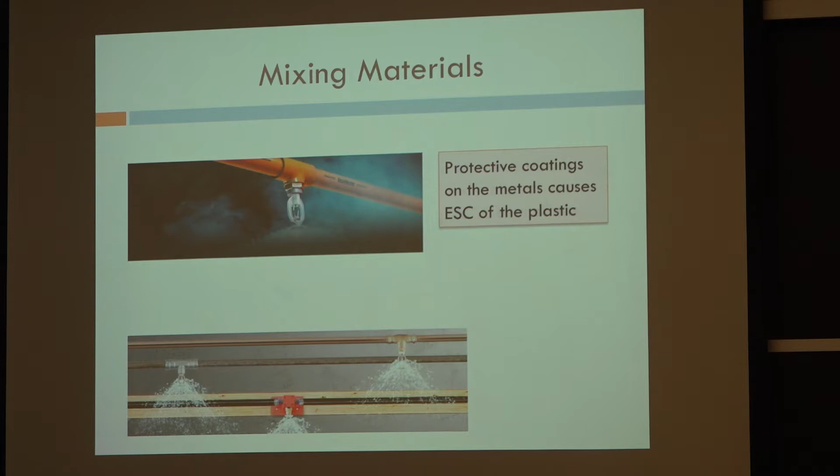These things actually operate around 200 psi, and so this gets a lot of water. But no one has ever died in a home that's had a sprinkler system in over 100 years. So it works. You might end up with a home that's flooded out, like Houston, but it works. It keeps people from dying in fires.

Nonetheless, they decided they wanted to go and save some money. Instead of using copper or steel, they decided to go with plastic, and it turns out it's not a problem with the plastic, but the problem is that the water comes in on some of the old steel pipes, and the steel pipes had a biocide sprayed on the inside to keep the bugs and the corrosion down.

It turns out that polymer they put on the inside of the steel pipe gets into the water, and since it's stagnant water, not flowing through like in a potable water system, it just sits there and cracks the plastic. So there are lots of buildings in this country right now that have sprinkler systems that work all the time, but they're leaking.

And so there's a lot of secondary effects that you don't always think about that you run into.

I did want to kind of shift gears and take a couple of industries and talk about what's happened in some of these industries. This is the gas turbine industry, so if you're interested in aerospace and engines, it turns out...

Whittle was the British guy who developed the gas turbine, and there's a nice quote from him on how he invented it in like 1936. It was during World War II that it actually came into use, and the Germans had V2 rockets and things with turbines, some of the first gas turbines. But those original gas turbines didn't operate at very high temperatures.

In fact, most of them worked at stainless steel temperatures, so you were talking 500 or 700 degrees centigrade, which is not terribly hot. In any case, people started working on better and better materials, and these were uncooled, solid materials.

They started going to nickel-based superalloys in the 50s, 60s, and 70s. As they went to the nickel-based superalloys, they learned you didn't like fine grain sizes. Finer grain size at high temperature meant creep.

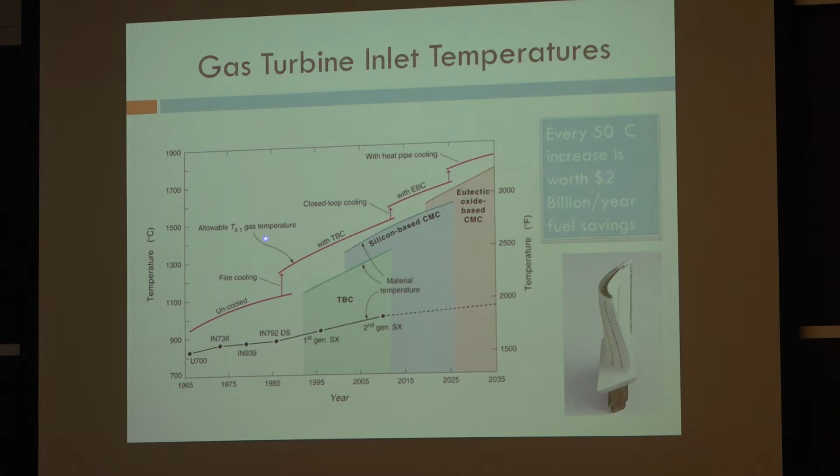But why are they doing it? Because every 50 degrees centigrade increase in operating temperature of that engine is worth $2 billion a year to the commercial airlines in fuel savings. It doesn't take much to end up with a lot of money. So we can talk about the value of a pound saved in a structure, but when you start looking at some engine that's driving it, you can have multiples. That's why people spend so much money on engine technology.

In that figure, it has silicon-based CMC starting back in 2004 - is that not something we've seen yet? Because in 2017, we should be using that for the figure.

This figure was probably developed in 2004 or 5, and people were looking at niobium silicides and things like that because they're intermetallics, and they have higher melting points - not 1250 centigrade, they might be 2000 degrees centigrade, but they're brittle as can be. No one solved that brittleness problem. And they say, well, we're going to eventually solve the brittleness problem in our ceramics. Well, yeah, good. I'm not invested in that one right now.

But people are working on it. I remember serving on a committee back in about this time frame that was looking at how the Air Force should spend its $300 million a year in research money for engine development. It was a very interesting committee because there were about 40 of us on it - 2 of us were materials people, and a number of people were from General Electric, who was the chief engineer on such and such engine.

I can go back to an Ashby plot here somewhere - I think it's this plot that shows maximum service temperature, and there's nothing that goes to 3,000 centigrade, okay? It just doesn't exist. We don't have things with strong enough bonds. Diamond might do it if it didn't sublime before then or burn in the air.

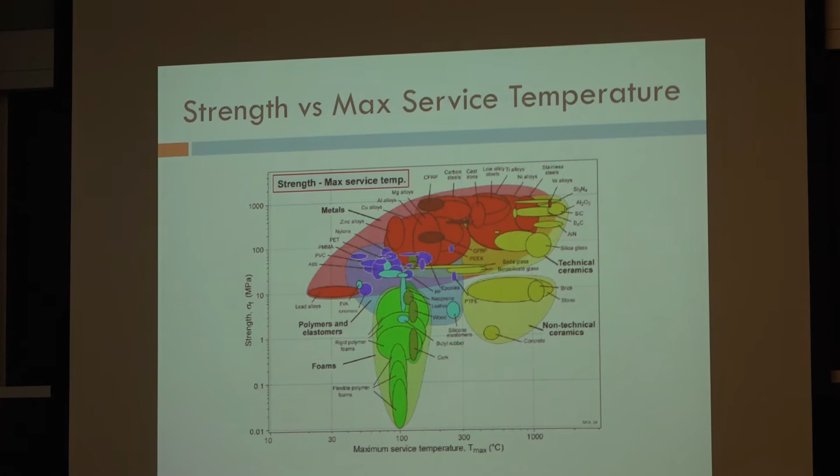So we would say we needed better designs. Well, this is like a 1975 design, folks - this is our 1980 design, not the latest stuff. They're getting these things down to less than a millimeter thick, like half a millimeter, and they have designs of 0.2 of a millimeter thick for the walls.

Do you know how hard it is to cast that with any accuracy? They do it - the reason we have CAT scanners for metals today is primarily because every turbine blade gets a full CAT scan to measure the wall thickness.

Because you've got a core that you cast this thing around and grow a single crystal around, and if that core is off by 2 or 3 thousandths of an inch from its perfect position - and its perfect position isn't just a center axis, it's a center axis and a twist - you're off by 2 or 3 thousandths over a couple of inches on something that's going to heat up to 1,300 degrees centigrade and melt, and it's a piece of junk. All of a sudden your manufacturability drops way off.

They continue to make progress because they spend billions of dollars. The problem the Air Force had - am I going in the wrong direction? The problem the Air Force had is they only had $300 million a year, and they wanted to know how to spend it. The other problem they had was that they didn't just want regular old engines.

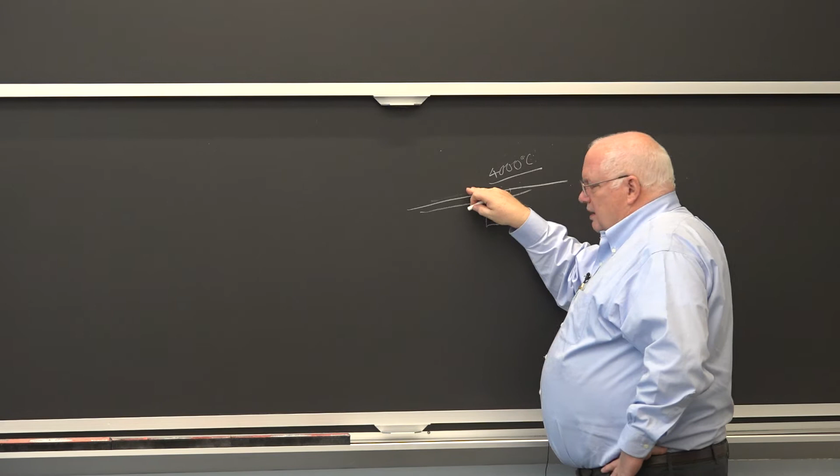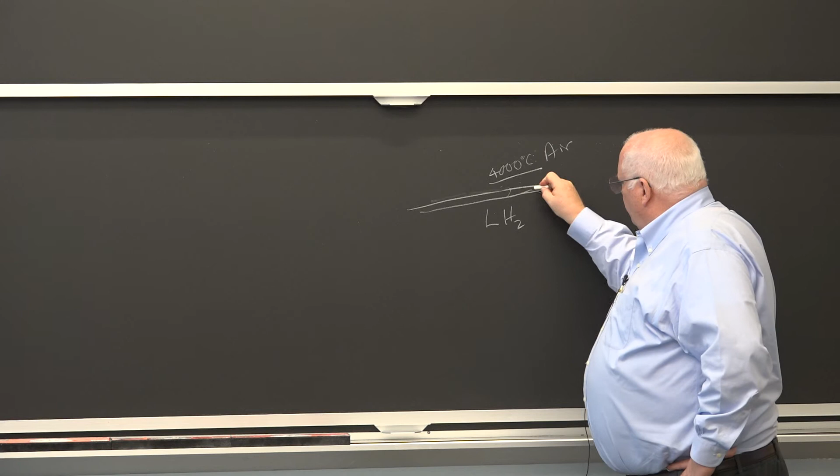You've learned that here. And they were going to basically bleed the hydrogen, have the cooling of the hydrogen. On this side of the thing, back in the National Aerospace Plane, it would be 4,000 or 5,000 degrees centigrade out here in the air - that's the frictional heating across the surface - and it would be cooled with liquid hydrogen. This would be a copper alloy. Copper alloys are not exactly known as high temperature alloys, okay? But it's going to be cooled, and this, they calculated, should be about no more than 2 millimeters thick, 80 thousandths of an inch.

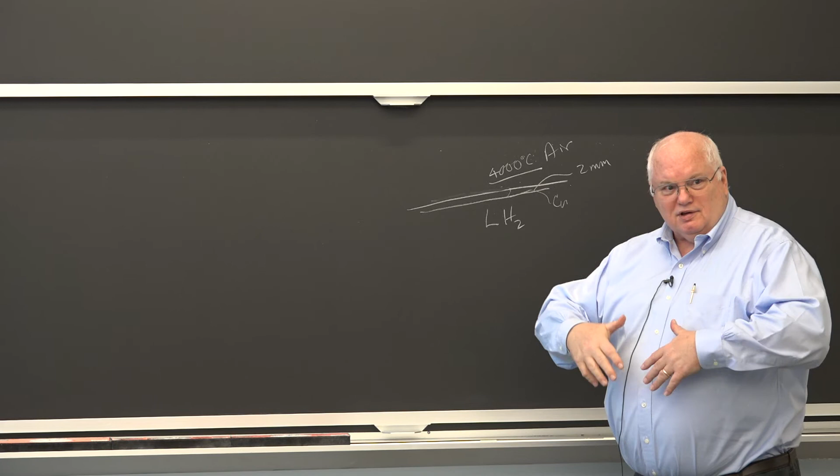Now, if you ever got a hole, a leak, it's the Space Shuttle Challenger all over again. Kaboom! Because you've got hydrogen in air at 4,000 degrees. It burns, okay? So, the risk benefit here, okay?

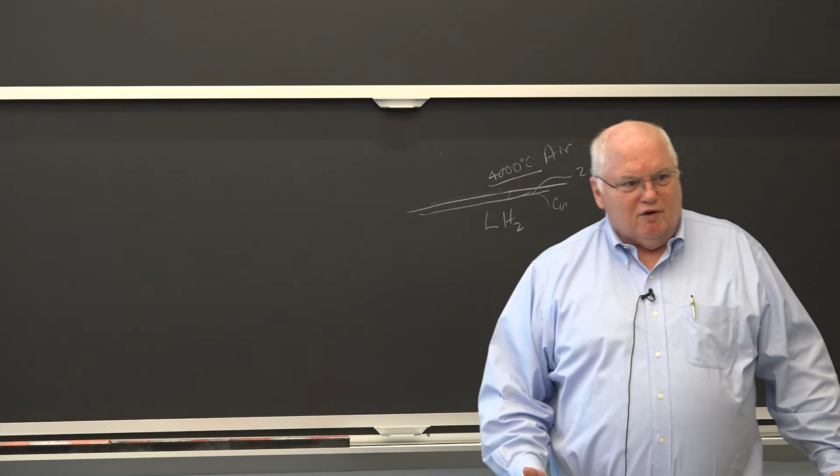Or do you know what risk is? Do people know what a risk is defined as? Risk is defined nowadays, this is done by psychologists, as the hazard times the opportunity, or a consequence.

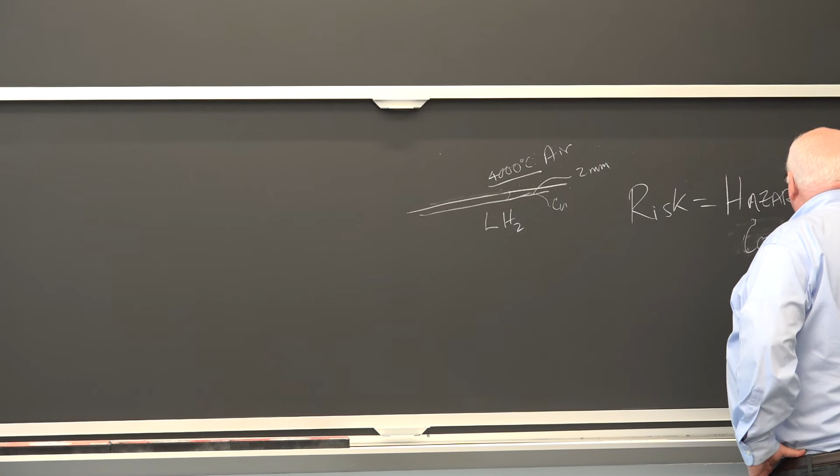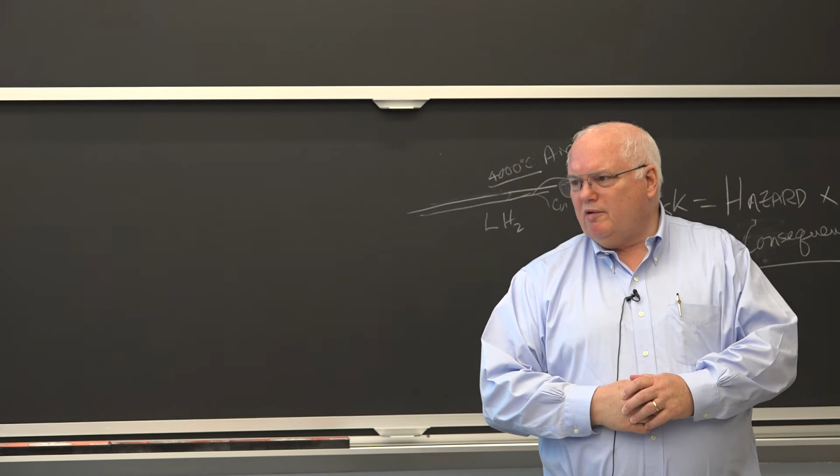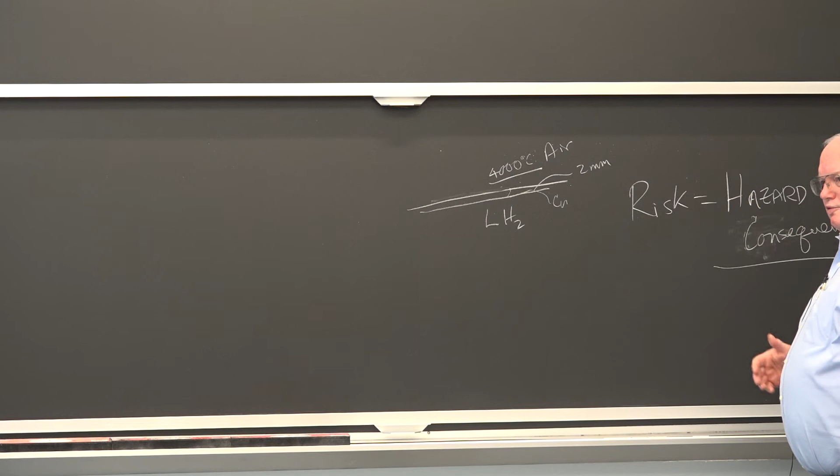And so I was actually just talking to somebody yesterday. I used to talk about if I'm manufacturing bricks for a building, I can probably tolerate one bad brick in 1,000, because if a brick is bad, the guy will probably throw it out, or even if he does mortar it into the building, it's not going to collapse because of one bad brick with a crack in it, right? But if I'm building Hubble telescopes, my quality should be more like 1 in a billion chance of failure, because the consequence is you can't fix it, okay, if it's the Hubble telescope. Or actually they did do some fixes, but they're very difficult and very expensive.

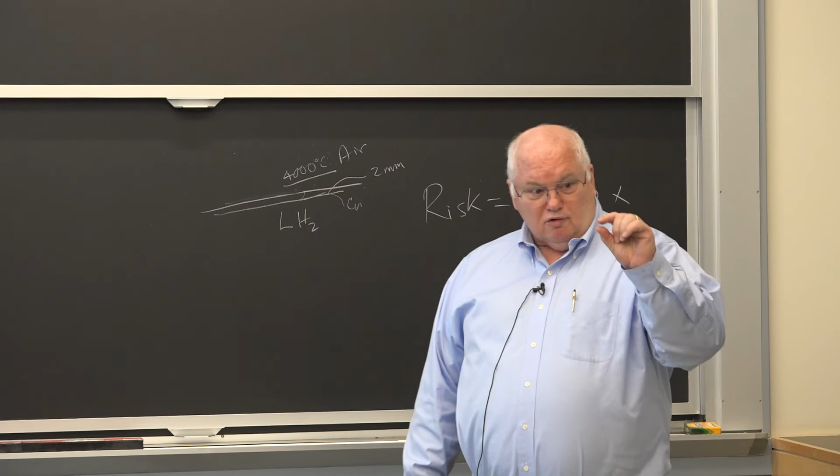The hazard here for the National Aerospace Plane was pretty severe. You'll blow up the whole aircraft if you have one small leak across something. And what are the thermal stresses across here? I mean, there are some thermal stresses, right?

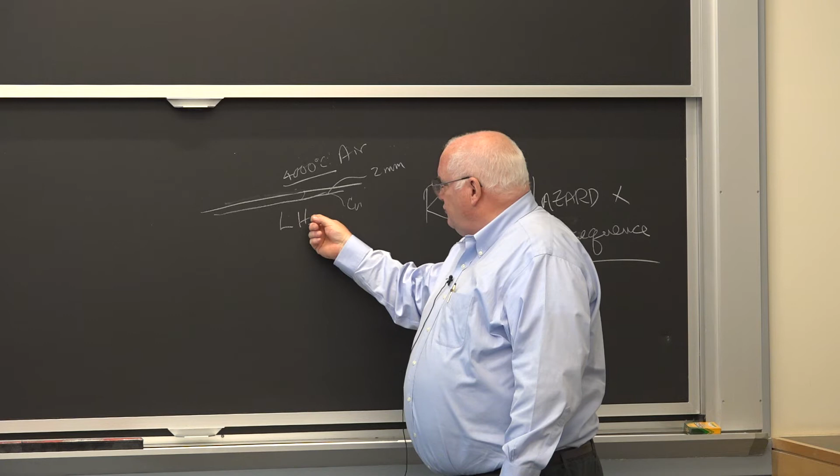270 minus 270 centigrade and 4,000 centigrade.

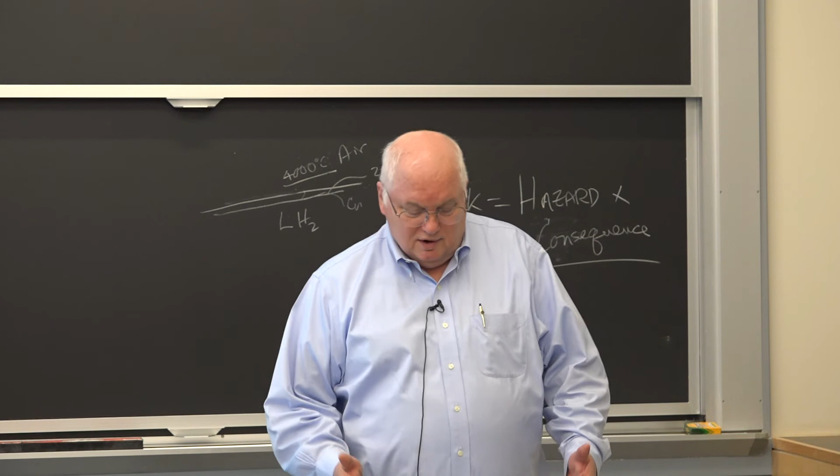I thought these are the Air Force's best designers, but they're people designing things to get money, funding from Congress. So it has nothing to do with anything that's practical. You look at these things and say, is this the best investment of our money? Couldn't we buy potato chips instead? I mean, anyway.

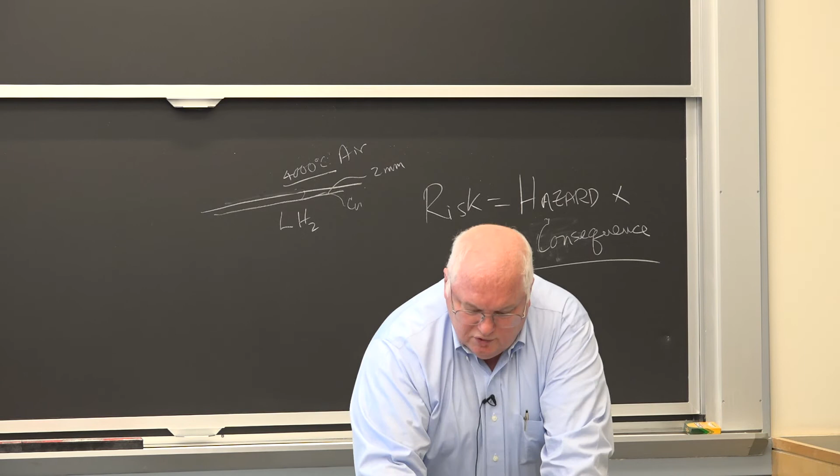Okay, so we did this review yesterday, or a couple days ago, and here we had good old Ashby basically pointing out a lot of our traditional metals where development is slow. He said mostly quality control and processing. We've hit the limits on the turbine blades, we've hit the limits on steel. I often point out, since I point out steel is the most important metal in the world, it is the most important metal.

It's not the most important material, it's stone. But steel, we spend more money on research on steel than we do on silicon. A lot more. Why? Because the industry is 10 times larger. Even if we only had 20% of the research on steel, it would be twice the research on silicon, even though the percentage research on silicon might be higher.

I actually wrote an article back in the 90s about the real challenge in materials engineering, and I was saying it was to basically make things less expensive, not go for tremendous property improvements, because frankly over the 20th century we did a lot to improve properties. We're actually getting to the limits of some of the properties, like the melting temperature, okay?

Okay, let's talk about something—Maslow's hierarchy of needs. I haven't talked about that in here yet. You know what Maslow's hierarchy of needs are? What are they? It's a little pyramid scheme, right? Not exactly a pyramid scheme, but at the bottom is food, shelter, and clothing. And then you have other needs, and up here it's self-actualization.

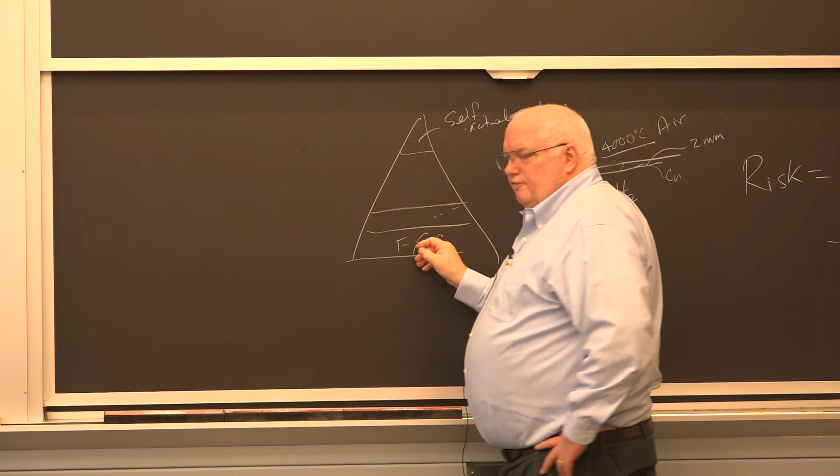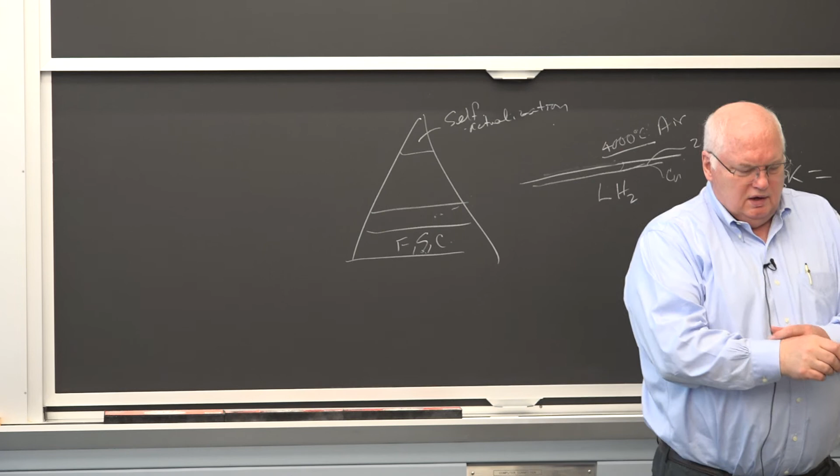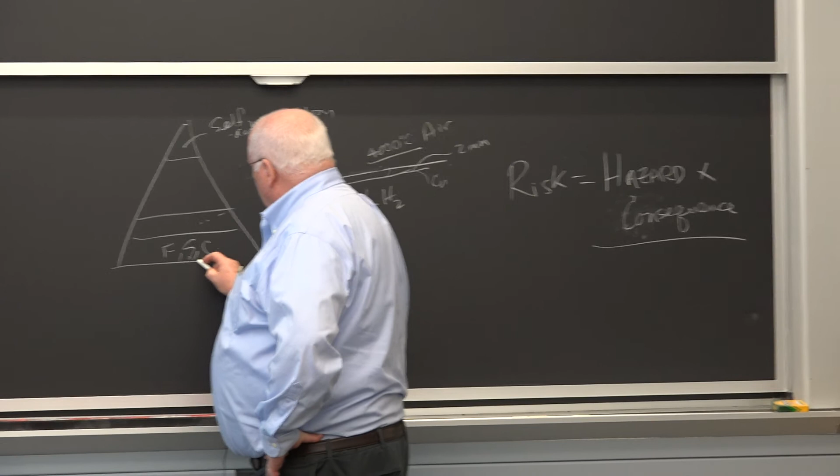But people first are interested in basic needs of life: food, shelter, clothing, housing. Then they can worry about getting an education or other things. You can look up Maslow's hierarchy of needs. He came up with this back in the 50s, and now a lot of people criticize it, but nonetheless it's fairly well known. Actually, I have a good slide, you can find it if you wanted. But there's been some other things added down here to Maslow.

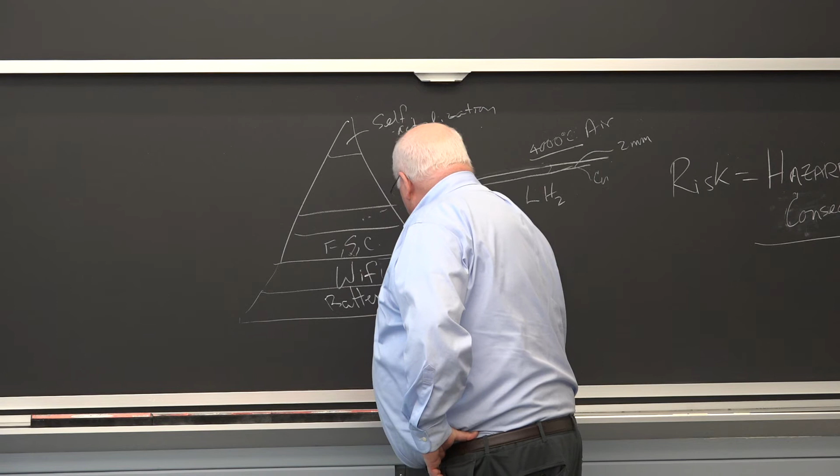There's two other things below this. The first one is Wi-Fi, more important than food and shelter. And the other is battery life, more important than Wi-Fi. Anyway, so we've added to Maslow.

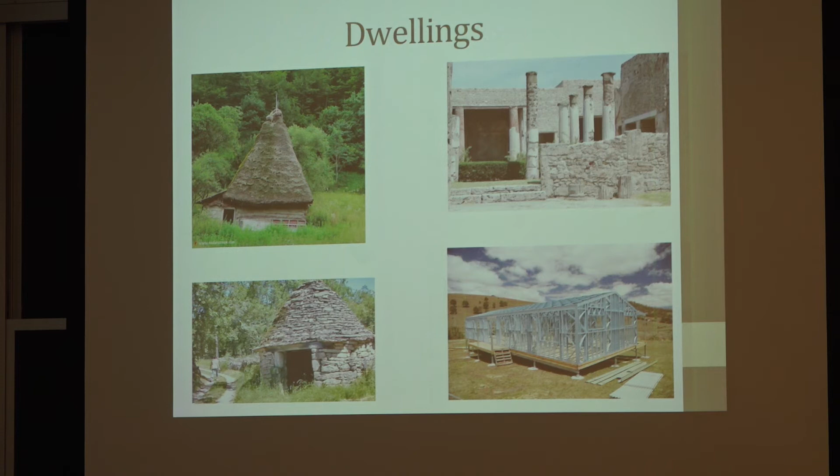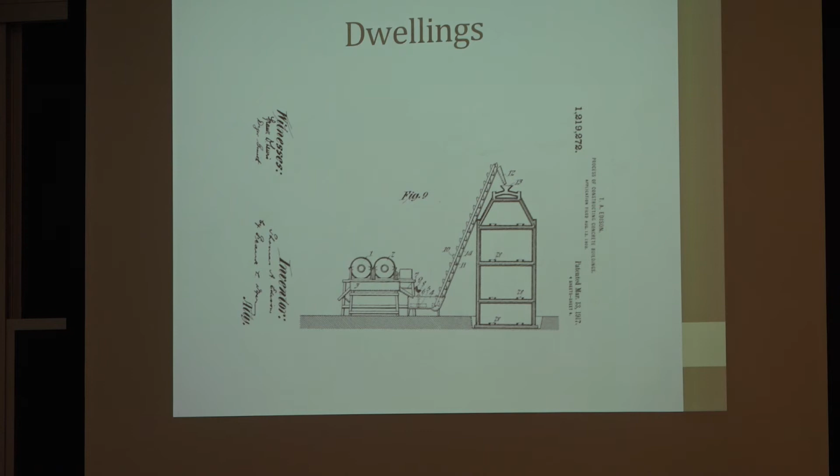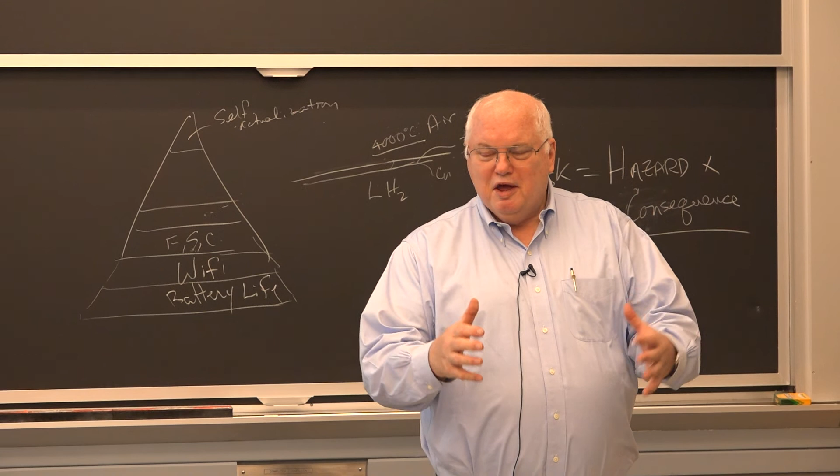Can you think of an advantage or a disadvantage? You have earthquakes—you can't have an earthquake? Actually, if it's a small home, you can. I mean a small block, it's not going to... but you're right, a big building, earthquake, no, you got problems. And part of the problem is I don't think he was doing reinforced steel, reinforced structures and stuff. But yeah, earthquakes could be a problem for big ones.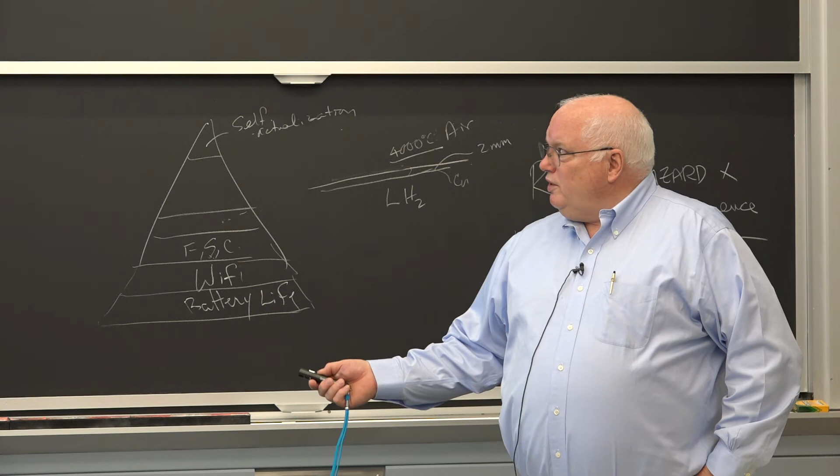And nowadays, we wouldn't build a structure like this. The codes wouldn't allow it unless we reinforce it with steel, okay? Because of its lousy, or its brittle nature, its lousy tensile properties.

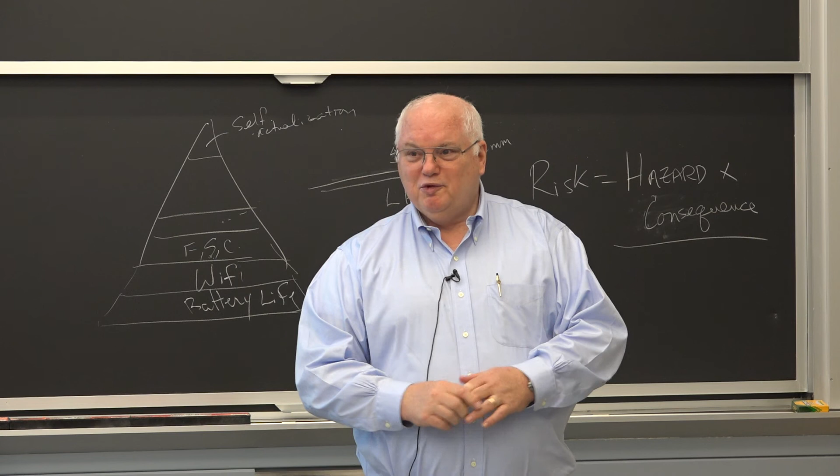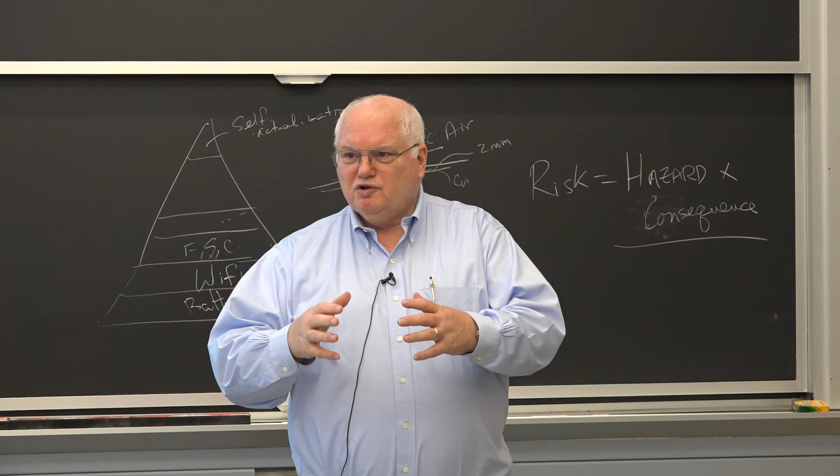We made blocks and cast the polyurethane and measured it. But basically, the codes say you're not allowed to put it down in layers more than 2 inches thick at a time. If people go in there spraying it 4 or 6 inches thick, it's such a good insulator that the exothermic nature would basically ignite. So you burn down your home by putting insulation in. But now they have codes and standards to correct for it.

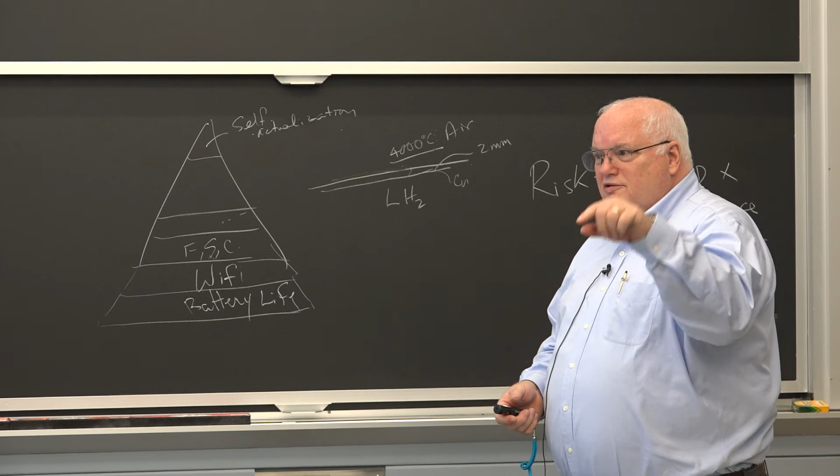Other thoughts? Fire, it's going to be very fire resistant. You can't remodel it. Not only does yours look like everyone else's in the neighborhood, but you can't do much. Can you imagine what people are going to be trying to do? You can't put nails in the wall as easily as wood. There's no creativity in refurbishing your home. So there's lots of things to start thinking about when you start thinking about these things.

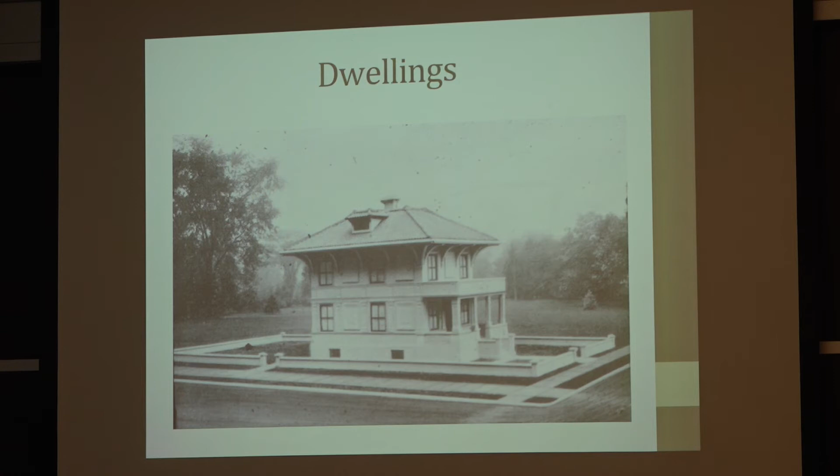Actually, people have been living in concrete block houses. That was a project a student did once—she was from Mexico and she did adobe. With adobe, I didn't know this, but they tend to use manure in many cases because it keeps the flies away. So it's just straw and manure, and you build your house out of that. One of the problems is it does smell for a few years.

Anyway, melting of metals—I want to talk about metals now rather than concrete. But people will look—I guess I just brought up Edison and his concrete home as an example of people looking for different things to use. With concrete, they look at it because it's cheap. You can't exactly move that home—it'd be cheaper to blow it up than to move it.

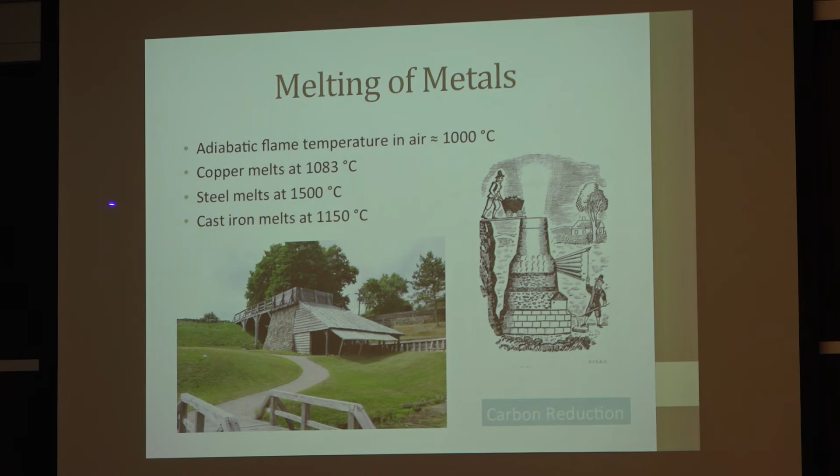For years, we could not melt steel, and I'll talk about that. Cast iron melts at 1150, so you can actually build a blast furnace.

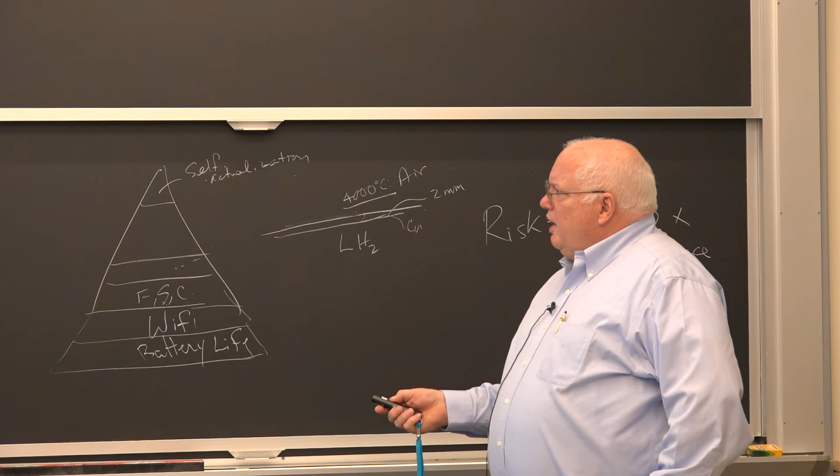This is a picture of an old blast furnace. You have some guy at the top precariously here, dumping coal and limestone and iron ore into this blast furnace. There's bellows here. If you go to Saugus Iron Works, this is the Saugus National Historic Site, the first cast iron foundry in the United States.

There's actually a water wheel, and that's the sluice for the water wheel. This is the platform where they drop the stuff in the top. This is actually the chamber, the stone blast chamber. The sluice would run a bellows that blows the blast of air in here to get up to the 1150 degrees you need to melt cast iron.

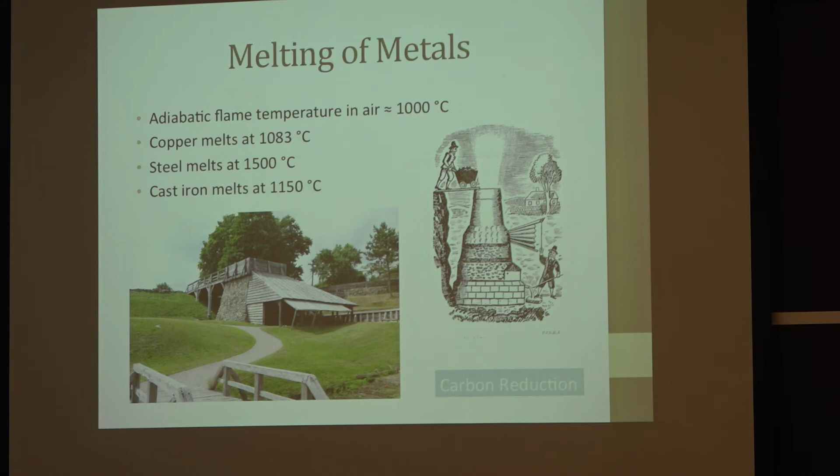Cast iron was a strategic material militarily because that's what your cannonballs and your cannons were made out of. The first cannons were made out of brass, but they weren't as strong and they were expensive, and eventually people developed cast iron. So if we go to steel, you've already heard it's got unique things.

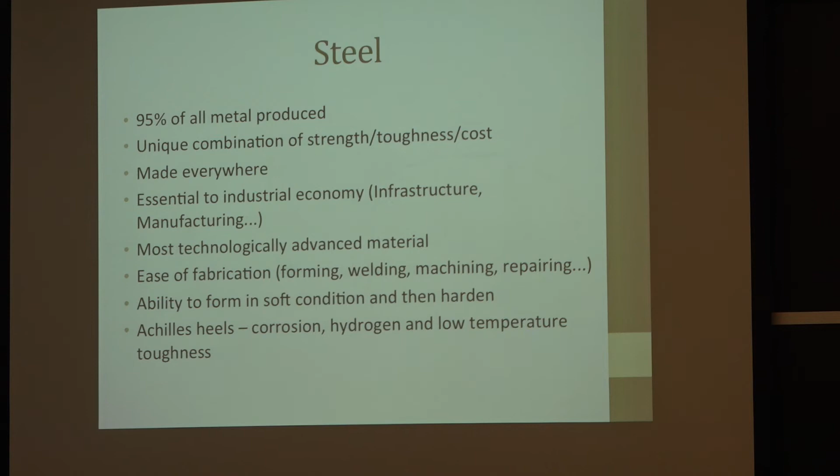You can form it in soft condition and then harden it. I did a paper in my junior humanities class on the hardenability of steel, learning how to harden steel. And it goes back thousands of years. People made swords in quenched and tempered steels. The Achilles heels of steel are corrosion, hydrogen cracking, and low temperature toughness, which we've talked a little bit about. That was part of the Liberty ships, and that's why you need fracture energy.

Now, if you go to the history of steel making, we had two types: cast iron and wrought iron. Anybody know the difference between the two of them? One's forged, one's cast. Yep, but why? What's the difference in the composition?

Cast iron is like 3 or 4% carbon and is very brittle, unless we now learned after World War II how to make it ductile. We call it ductile iron. But the traditional cast iron for thousands of years is very brittle.

The wrought iron, you basically take cast iron and you blow air through it. They called it puddling of iron. People would have bellows and blow, and they burn the carbon off. Then they would end up with something that's mostly iron with very low carbon, and now it can be forged and beat into useful things by blacksmiths.

So if it's only at 700C, is it just diffusion? Oh, I'm going to talk about that. Well, it is a diffusion process to smelt it. You don't melt it. You actually take the iron ore, put it in with a bunch of charcoal, put it in an oxygen depleted environment, and you get a reducing carbon monoxide atmosphere, which reduces, and you get sponge iron. You basically get something that looks like a sponge. It's all porous, and you have to forge that back into a solid chunk. You lose 50% of it by oxidation in the forge as you're pounding it to get all the pores out of it. But it is a solid state process at 700C.

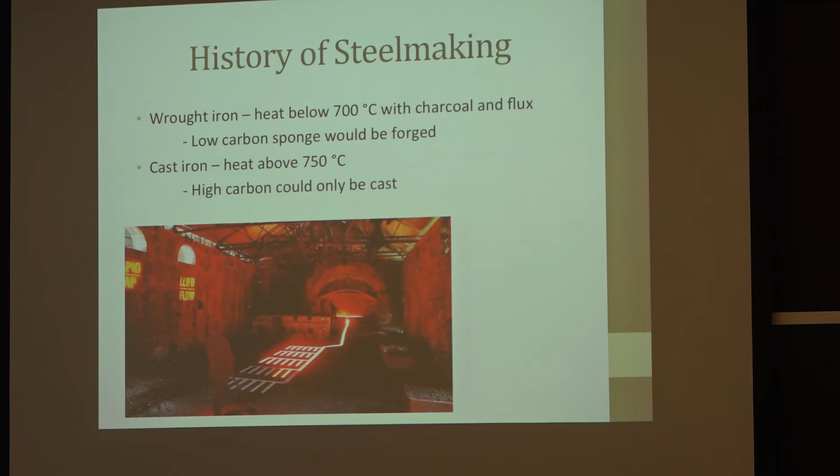They later learned to not do this at 700C, but to take the cast iron and blow oxygen through it and make puddled iron. That's at higher temperatures. And that's what they were doing in the 1850s when Bessemer came along. He was trying to improve puddling of iron, and he learned a way to make steel without puddling it.

But this is low carbon. It would be forged, and high carbon has to be cast and is brittle and cannot be forged. It will break when you hit it.

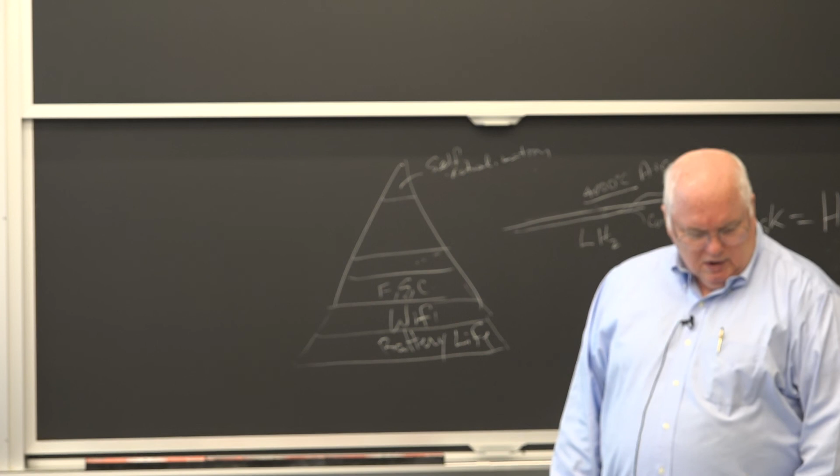If you look at the iron carbon phase diagram, which we won't go through, here's pure iron at 1500 something centigrade melting temperature. If you add 3 or 4% carbon, you get a eutectic that's just under 1200, 1148 C. You have different phases in here that we don't have to go through.

But they didn't really know, well, they didn't even know what a phase diagram was until J. Willard Gibbs came along in the 1870s and told them what a phase was. Then in the 1880s, they developed metallography, and that was the beginning of metallurgy. MIT didn't start out with the Department of Metallurgy, it started out as the Department of Geology.

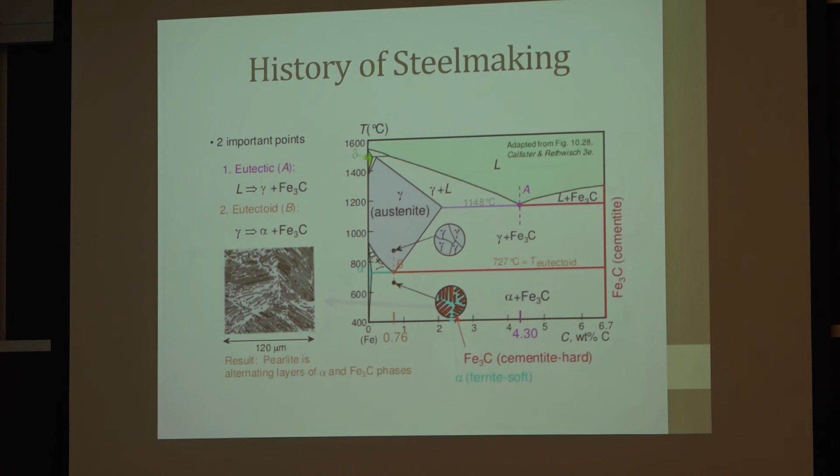It became the Department of Metallurgy in 1888 because this guy in England learned how to polish things and look at them in a microscope and see the structure of the material. This guy, Roberts-Austen, and Adolf Martens in France - Martensite and Austenite - they all have geological names like 'ite' on the end. Ferrite just means iron mineral, right? But that's because it came out of geology, so far as that goes.

You had this guy who was one of the greatest British scientists of all time, people say, because in 1856 he developed - this is his original Bessemer converter.

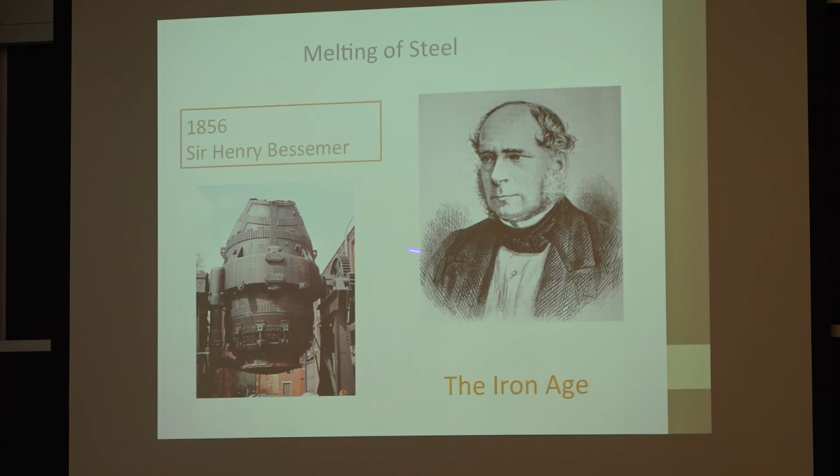He would take the cast iron and blow oxygen in, and he essentially came up with a way to make puddled iron, where you blow air into cast iron and turn it into steel. That's the beginning of the Bessemer age, and of Andrew Carnegie becoming the richest man in the world.

It's an interesting story, could be a good paper, about how Andrew Carnegie did some shady things in Pennsylvania and ended up with part of a steel company. But he became the richest man in the world, so far as anyone knows in modern times, in constant dollars. That's the environment he produced for everything.

But he actually was a very kind Scotsman in many ways. When you're that rich, you can be kind. He said: take away my people, leave my factories, and soon grass will grow on our factory floors. Take away my factories and leave my people, and soon we will have new and better factories. That's not the philosophy of most businessmen today, but Andrew Carnegie and others sort of competed to be well thought of after they raped and pillaged the economy.

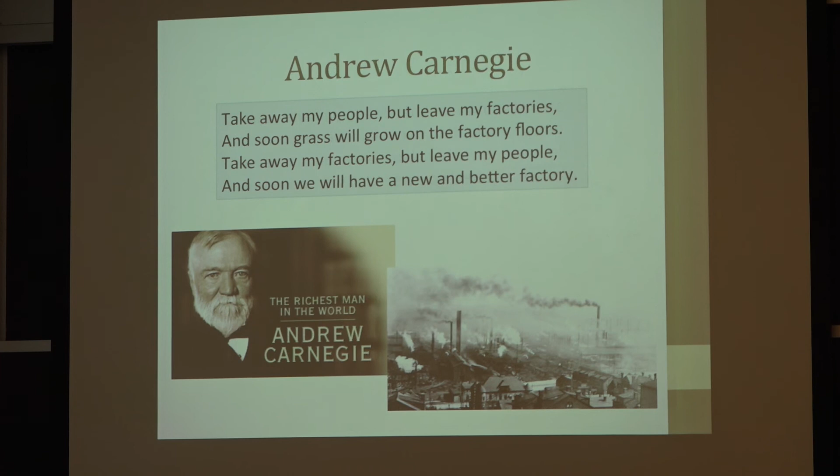Rockefeller, who started Standard Oil, used to go around giving away dimes. But a dime was sort of like a $10 bill nowadays, okay? He'd just go down the street and hand out dimes to people. That was Rockefeller, sorry. I actually have a good story on Andrew Carnegie and my grandfather, but we'll do that some other time.

My grandfather helped start the University of Chattanooga, and he got the last money from Andrew Carnegie.

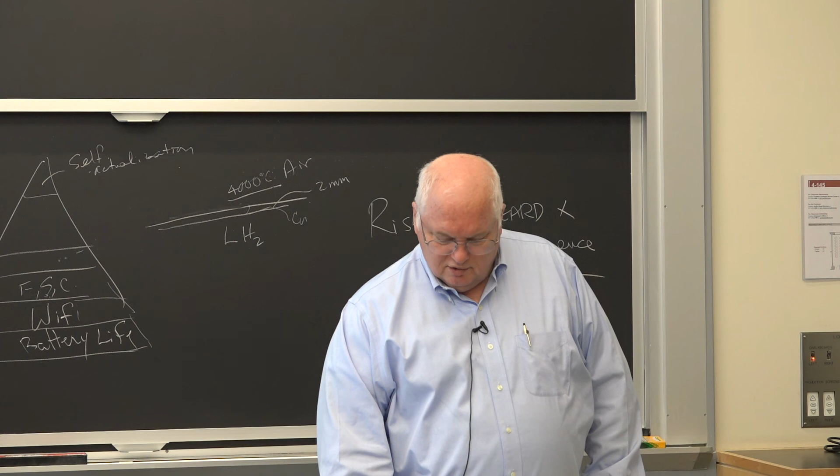But anyway, Andrew Carnegie's real thing, just like Bill Gates wants to improve health in the third world, Andrew Carnegie's thing was education. So there's Carnegie Libraries, Carnegie Mellon University. He gave a tremendous amount of his fortune away to universities.

Integrated steel mills, okay? It turns out most of the world's steel is still made in integrated steel mills. The last commercially built integrated steel mill in the world was Burns Harbor, Indiana, built by Bethlehem Steel, started in 1964, finished about 10 years later, right on Lake Michigan in Indiana. This is only part of it, it stretches for miles. It's as big as the MIT campus and a lot more industrial.

I've estimated in the past that it would cost $20 billion today to build an integrated steel mill. It turns out it is the most productive steel mill in the United States by far, because it's the only modern one. When I worked for Bethlehem Steel, they were very proud of the fact their blast furnaces were built in...

1912, and their coke ovens were built in 1911. The guy said it doesn't cost us anything to make steel because all our equipment's fully depreciated. I asked him, well, why is that? And he said, oh, that's because you don't understand finance. Well, I later learned that this vice president of finance didn't understand finance, and that's why Bethlehem Steel is bankrupt now.

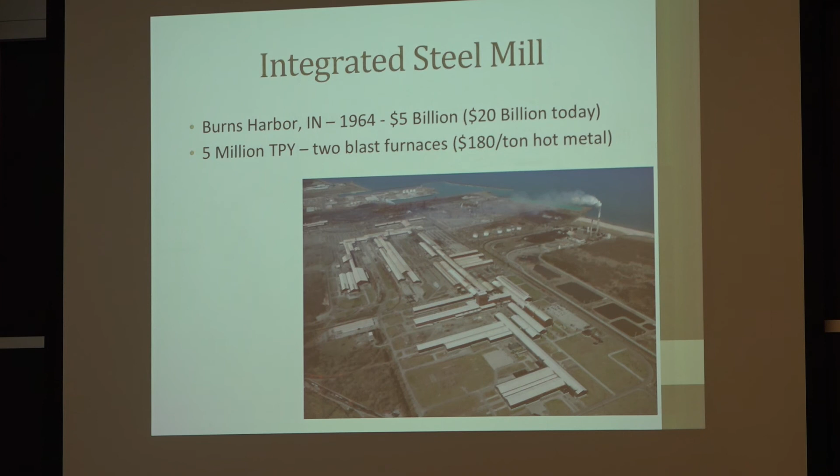Typically, these will be 5 million tons per year, two blast furnaces, and these blast furnaces can run for 2 or 3 years before they shut them down now, to reline the ceramics. That's based on $180 a ton hot metal, which was the price in the 1970s, and it's still the price today, not constant dollars. Actually, the price has gone down by about a factor of 3, because inflation has been about a factor of 3 since then.

The blast furnace takes all these things and it basically has stoves. There was just something on the MIT website about someone having this new idea to use an old technology to worry about solar energy and things like that — they're going to have hot bricks. Well, people have been using hot bricks to hold heat as just a massive bunch of bricks. Every blast furnace had 2 sets of brick stoves, and your exhaust gases go through one, heating up the bricks, while incoming air goes through the other, which had hot bricks.

Every 12 hours, you would shift the flow to reheat the cold bricks and use the heat from the hot ones. So it's a heat recovery system. They do the exact same thing in glass furnaces, because the energy cost is such a big fraction that you have to do something to conserve your energy.

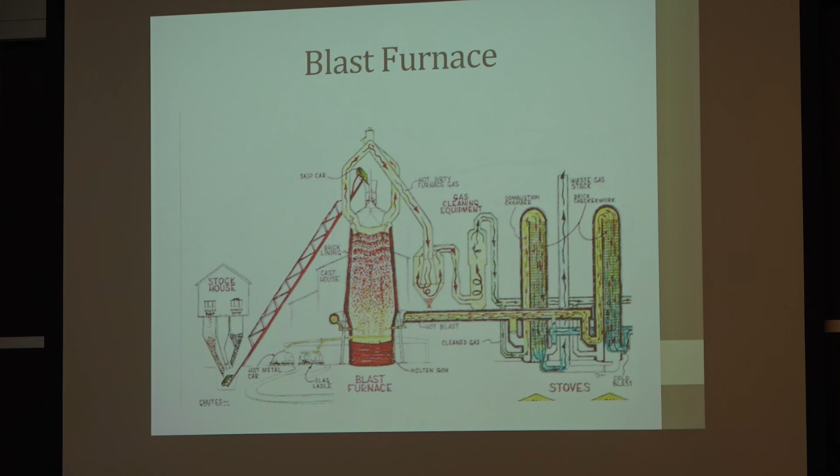The actual furnace is not much bigger, maybe twice the size of this room, but the brickwork around it is a couple of football fields. Then in the 1950s, a guy in Austria decided all you're doing in the other furnace is basically the Bessemer process of passing hot air over cast iron to burn the carbon off, turning it into a lower carbon version, which is basically steel. He decided, why don't we just use pure oxygen? Because the Germans had developed the Linde process for liquefying air, so you could get pure oxygen.

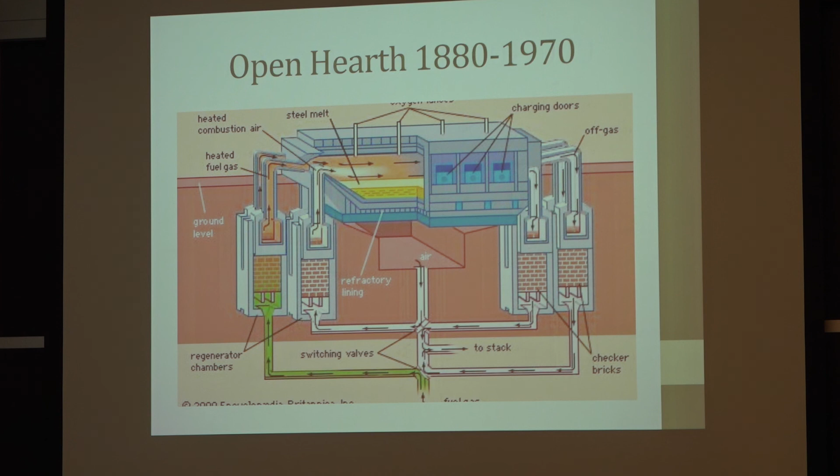So they built a basic oxygen furnace. In the old open hearth process, which would hold 400 tons of steel, it used to take anywhere from 24 to 48 hours to process that. The BOF furnace, which they started building around the 1960s, by the 1970s had taken over the entire industry. The last basic open hearth was built by U.S. Steel in the early 70s, and they were foolish to build that one. This new process handles 300 tons of steel in 20 minutes.

Yeah, so I've been to a forge and they were making parts and just putting them outside to cool down. Do you end up with differences in material properties because of the uncontrolled cooling atmosphere, and I assume the cost isn't worth it to build a controlled cooling room?

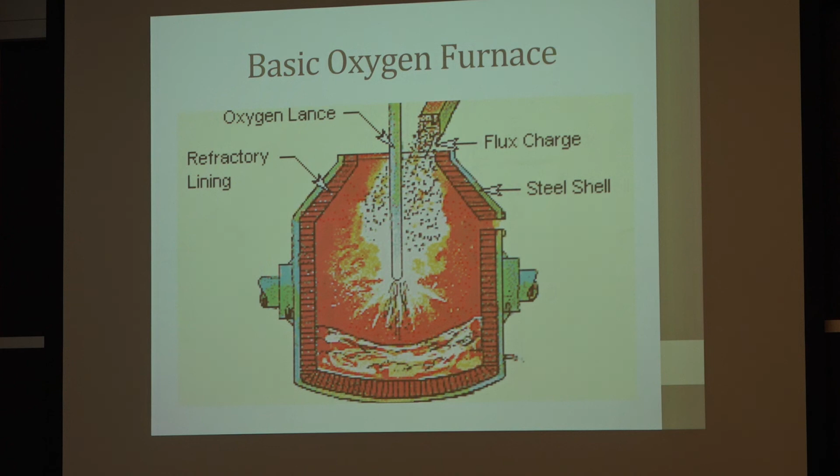If you have low carbon forged steel, you can do that. With higher carbon stuff, if it cools down too fast you'll get martensite and it might crack. So in a very high quality forge shop you'd have furnaces and do controlled cooling on big parts. But for small parts, if it's the right size, air cooling is great, it's called normalization, an actual heat treatment step. For low carbon steel, like forging a hinge, it's not critical, not a big deal. But most forgings are medium or high carbon going into turbines and things, and if you did that wrong, General Electric would fire you right away.

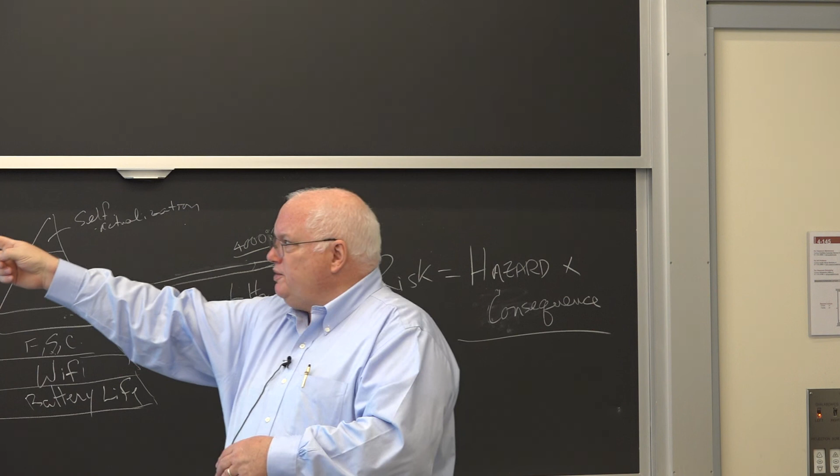What's the fuel for these furnaces, is it coke? The fuel in this one is oxygen, burning the carbon out of the cast iron. I've got about 4% carbon in that cast iron, so with 300 tons of cast iron that's 12 tons of carbon, and I blow pure oxygen in there. There's plenty of heat, I burn up 12 tons of coal... well, carbon.

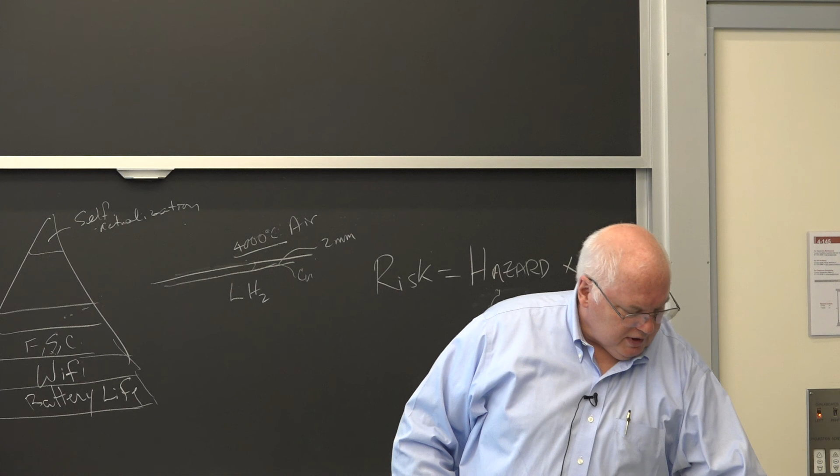That 300 tons, this whole thing stands about 4 or 5 stories tall, and the vessel itself is only about 4 or 5 feet tall at the bottom. When they blow the oxygen in at supersonic, pure oxygen velocities, it becomes a froth and fills up this whole 3 or 4 story tall container. It's just a foam, and it is fireworks galore.

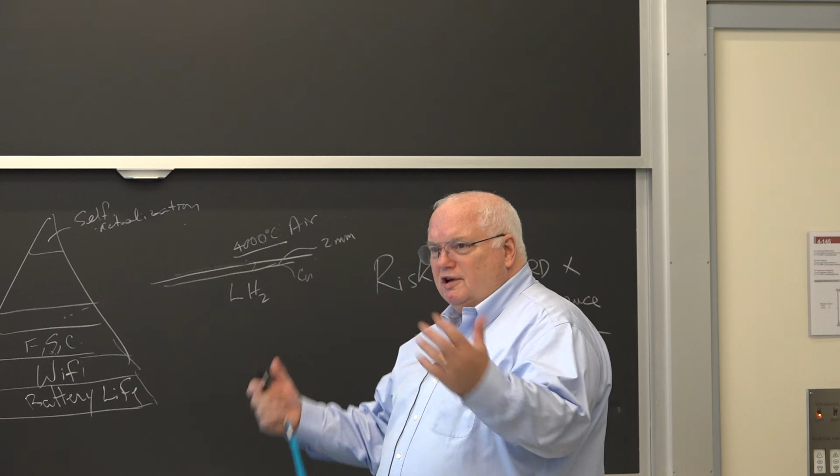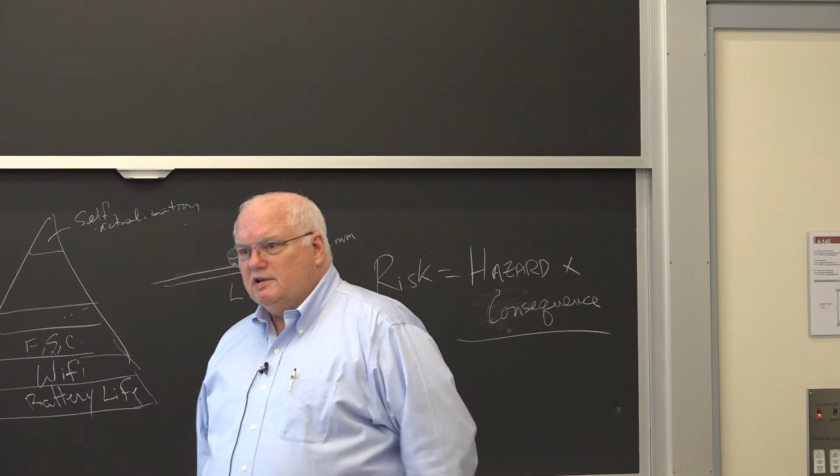It's real exciting. You're not allowed to stand anywhere, you've got to be in the doghouse, the control room, which is insulated, or you've got to be outside the building. There's literally sparks flying. It's a very violent reaction, but very efficient. It takes a 20-minute blow to get all the carbon out, whereas in the old days, when you just had a boundary layer and were blowing air across the top without getting a froth, it could take a day or two.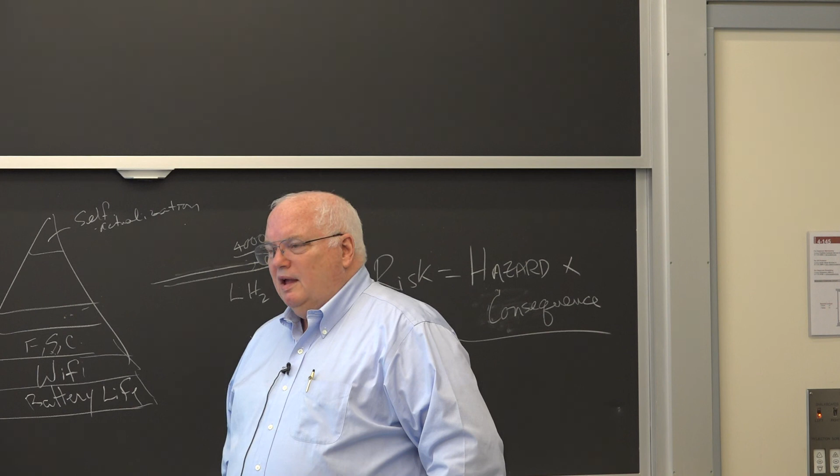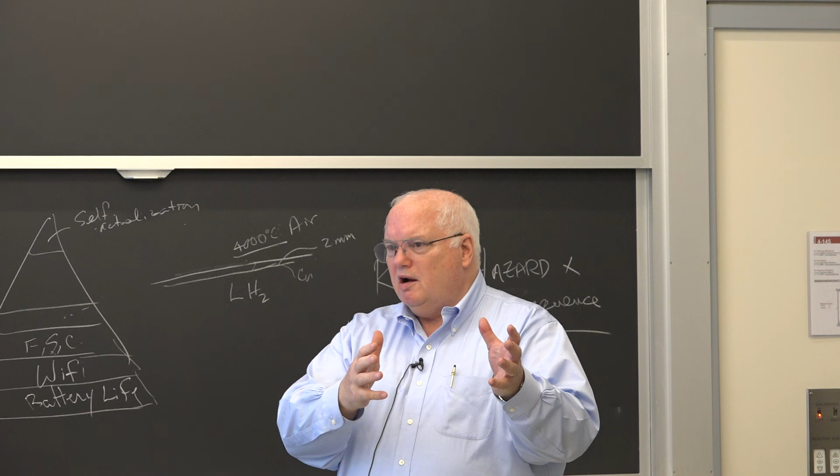That's one of the reasons we'll go through productivity next time. The productivity has gone from about 3,000 hours per ton of cast iron back in the days of Saugus Iron Works 400 years ago, to about 20 minutes today per ton to produce it. That has made a world of difference, and that's one of the reasons why steel is so widely used, it's cheap because they have spent so much money developing it.

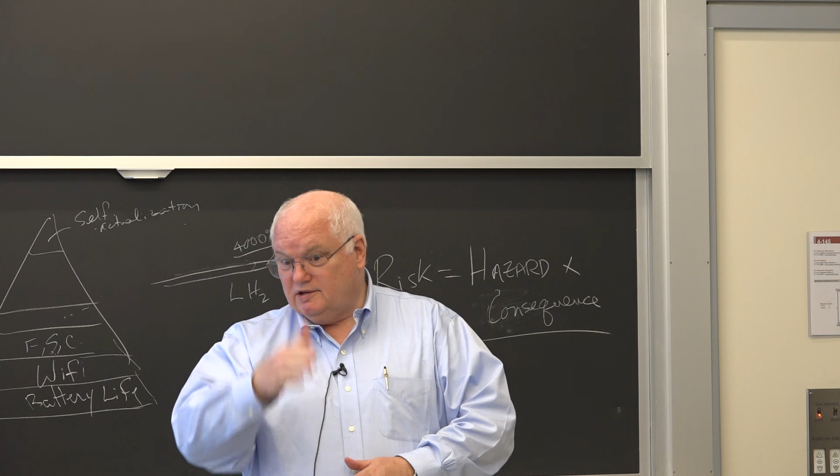And I'll show you the curve that I came up with, it's really dramatic, a log plot of cost going down, and it's getting steeper in recent years. Okay, we ran over, sorry.